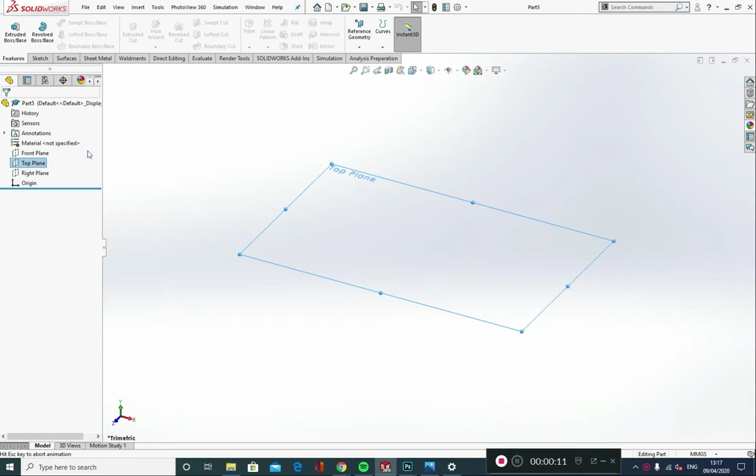Okay, so I'm in SolidWorks. I'm going to go to File, New, Part. I'm going to start drawing this particular mug from the top plane, so I'll go to top plane and Normal To. Now from here I'm going to go into the Sketch tab.

I'm going to grab a circle and sketch from my origin point. It's always good to ensure you've got a known reference point. So sketch that circle out, and I'm going to go to Smart Dimension. I'll left click on my circumference and give this a smart dimension of 80 for its diameter.

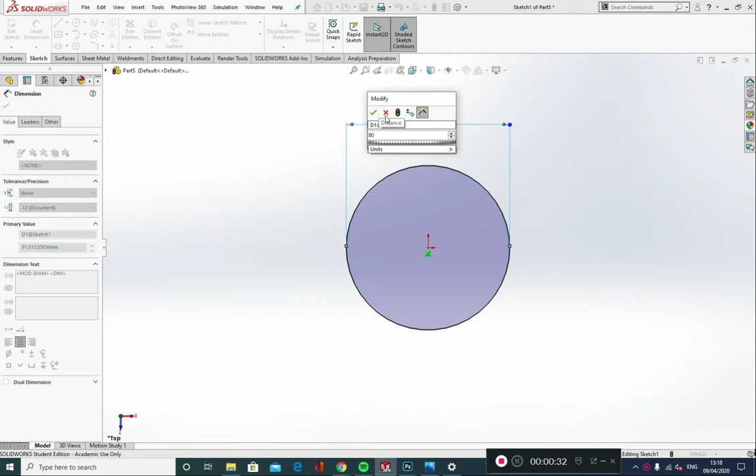I'm then going to make a feature out of this, so I'll go to Features, Extruded Boss Base. I'm going to extrude this by 100. I can use this arrow here and pull up on that until I get to 100, like so. Alternatively, I could have typed the value in here. Then I'll click on the green tick.

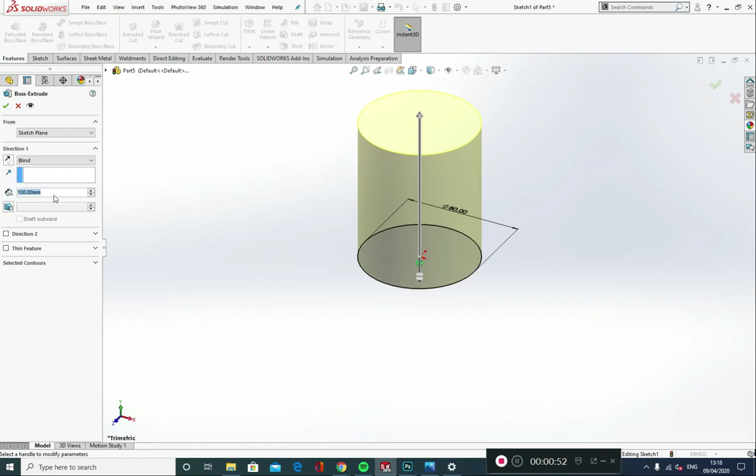Okay, that's the main cylindrical shape of our mug complete. We now need to put the handle on. So we're going to go into the front plane and sketch, and do Control 8 on our keyboard, which will give us a Normal To view.

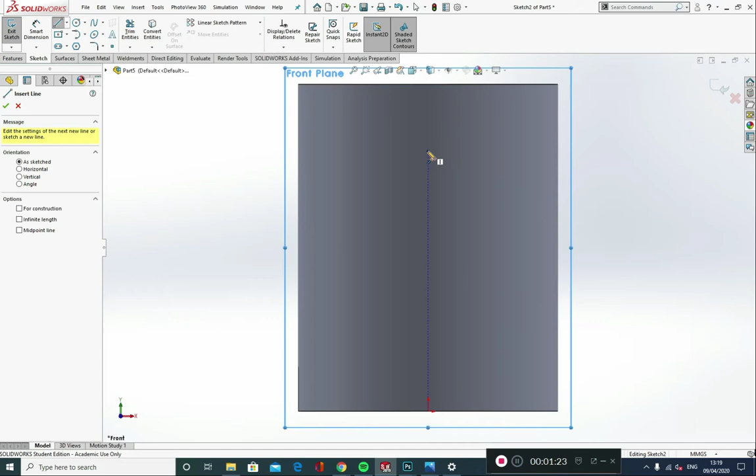From here we're going to get a line. We're going to draw a line in line with our origin. If I just hover over in line with my origin, I get this nice blue dotted line to show me that I am in line with the origin point. I'm going to left click again. Now I want an arc. The quickest way to get an arc in SolidWorks is to go back to the point without clicking and just move the mouse round in an arc direction, an arc movement.

Okay, and you will get that arc appearing. Left click again once it's in line with that top point, and back again, and left click again when it's in line with that blue line showing that it's in line with the first point we made and in line with the origin, and left click.

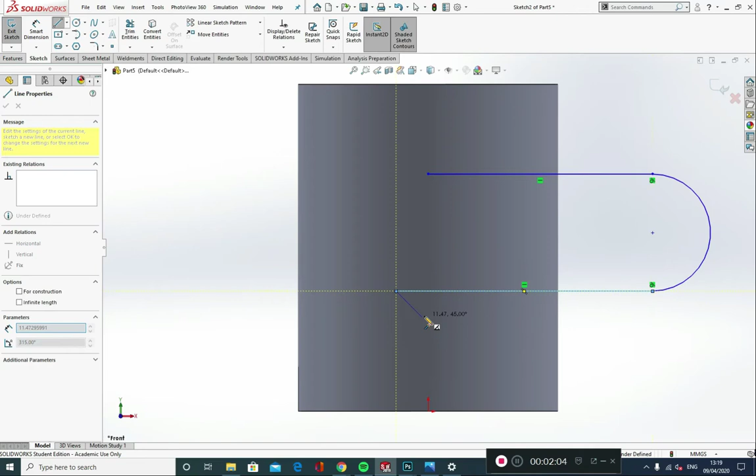Okay, if by any chance you make a mistake, let's say your line finishes over here by accident, that's not a major problem. All you need to do is pick on this point here, hold down Control, click on the origin point, and make those vertical.

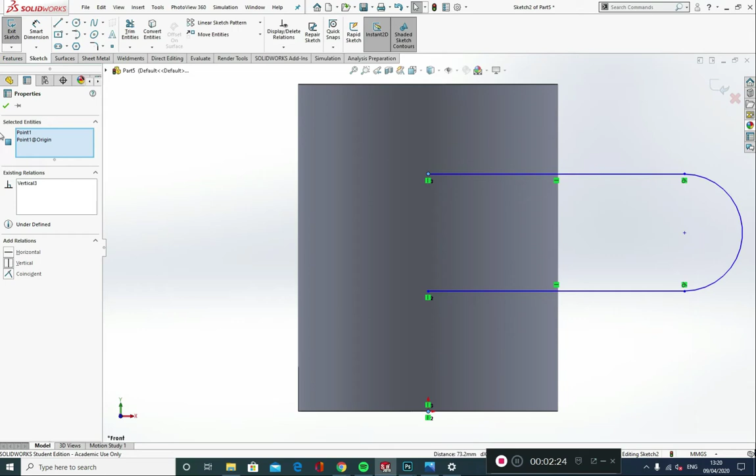Okay, let's sort that point out as well. So this point here, and click on my origin, and I want to make those vertical. Okay, so that just adds a nice relationship between all those points.

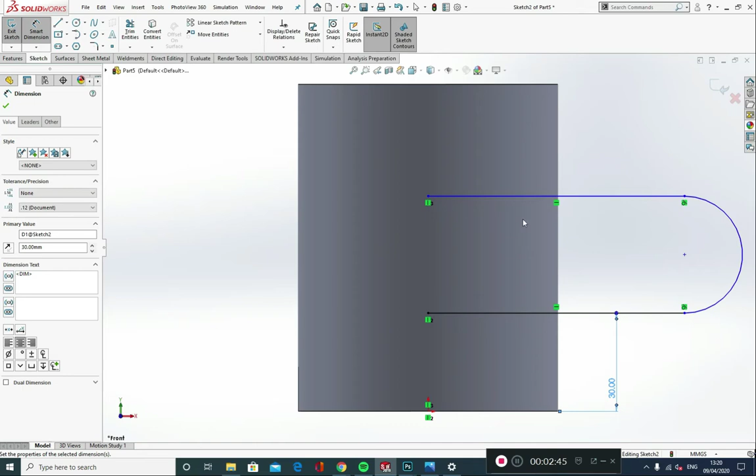Let's add some smart dimensions then. So we're going to go to Smart Dimensions. From this line to the bottom of my cup, I want to be 50. It's a bit high, let's try 30. It's a bit better. Okay, from this line to this line, I would like that to be 50. And from this point here to this point here, I would like this to be also 50.

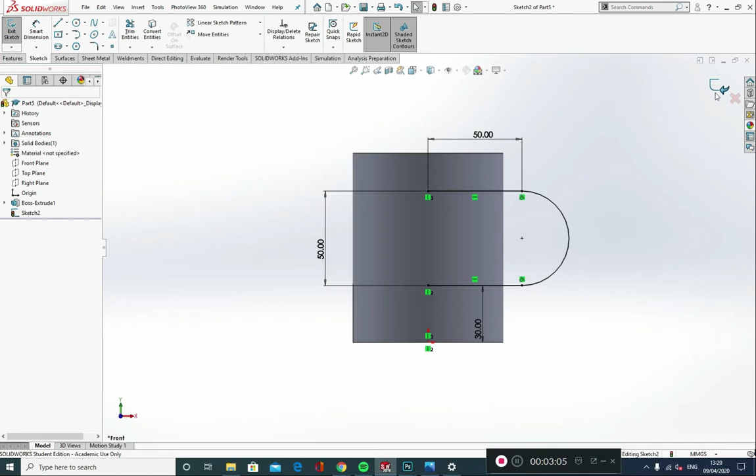Okay, and I'm going to click on the green tick, and exit the sketch by clicking on this icon here, and you can see what I've created. Now this is going to be the path for our swept boss base.

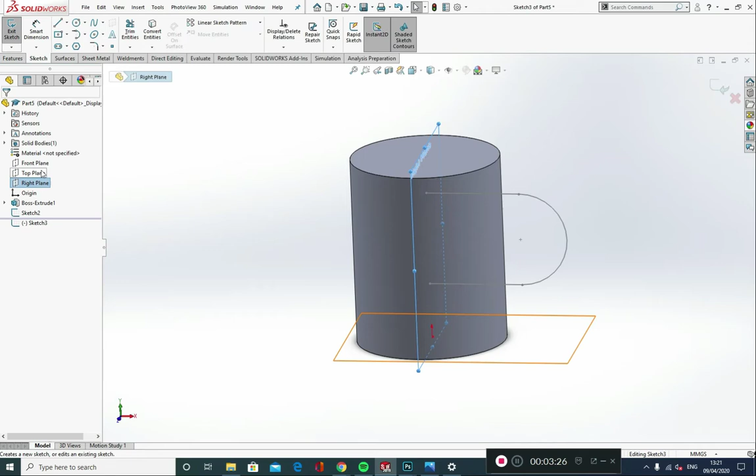So this is the path. We're now going to create the profile for this. So I'm going to go into the right plane, go to Sketch, and Control 8 on my keyboard for a Normal To view. I'm just going to change the display settings to hidden lines removed, just so I can see the sketch I just did.

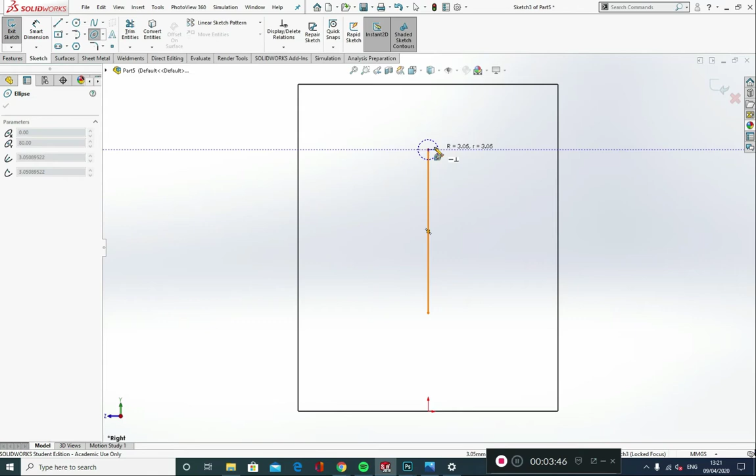I'm going to create an ellipse. So in my Sketch tab, I'm going to go to Ellipse. I'm going to click on this top point, move my mouse from left to right, or right to left. I'll click again, then move my mouse up or down, and that will give me the height of my ellipse. Left click again, go to Smart Dimension, and I'm going to give this a smart dimension of 15 by 6.

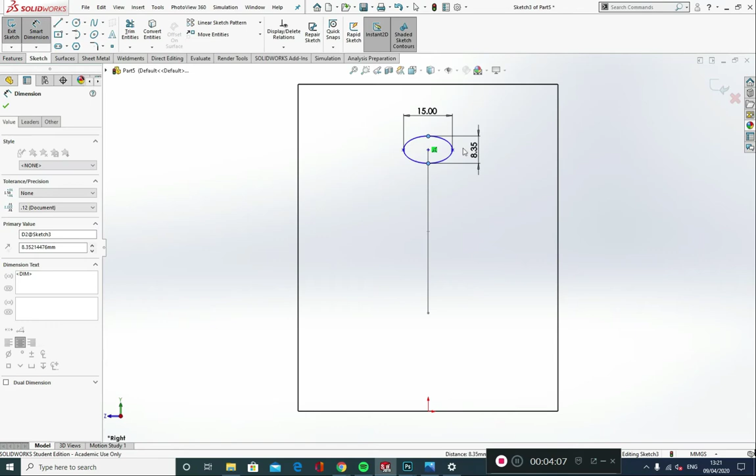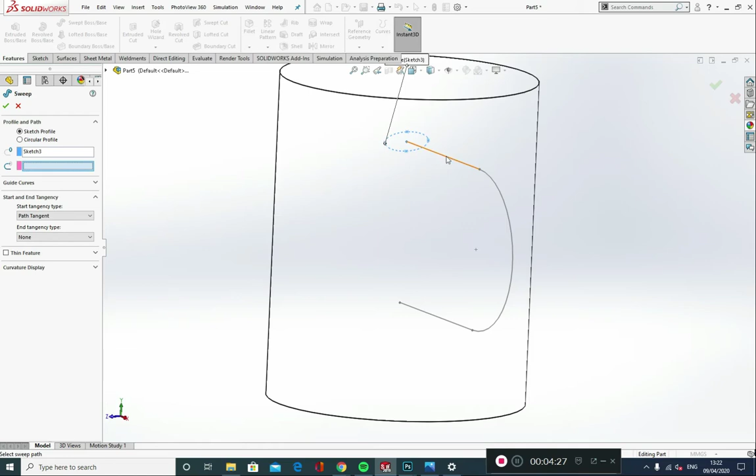Okay, green tick, and exit my sketch. Now from here, I'm going to create a swept boss base. So I'm going to go into Swept Boss Base. You can see here, because I already had that sketch selected, it's picked up my profile. I now need to pick the path, which is going to be this line. That's been created, and I'm going to click on the green OK button.

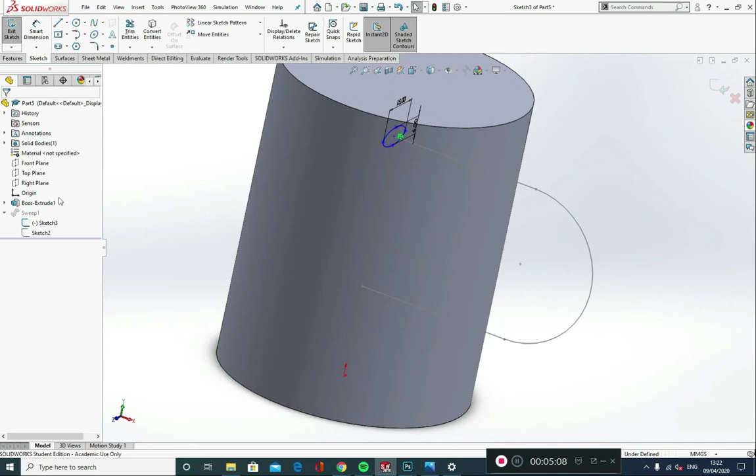Now that's looking a little bit skinny for my liking, so I want to beef this up a little bit with bigger dimensions. I'm going to go into my Sweep1, click on this arrow next to it, and I can see my two sketches. This sketch is fine, so the path is fine. It is the profile that I want to lengthen some of the dimensions. I'm going to left click on the icon and go to Edit Sketch, Control 8 on my keyboard, so it's a nice normal view. Double click on this dimension and change this to 20, and double click on this dimension and change this to 8. From here I am now going to exit the sketch, and you can see that has been updated.

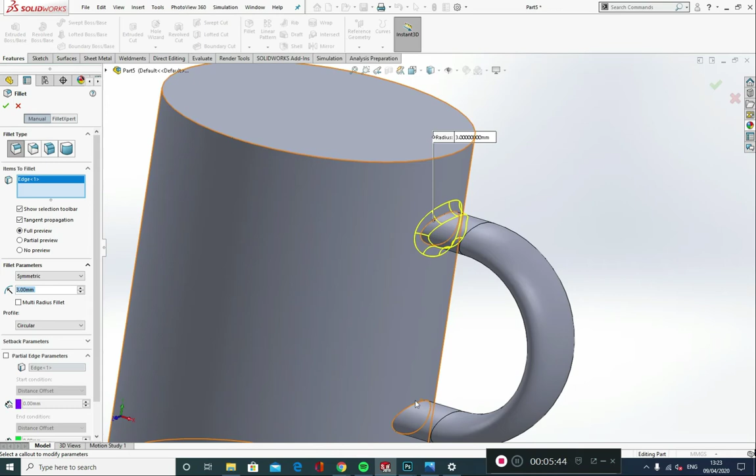Let's apply some fillets now. So in Features, I'm going to go to Fillet, and I want a constant fillet, so it's this one here on the left hand side, and I'm going to make these 3mm. I'm just going to left click on this edge here. You can see we've got a nice full preview because this has been selected, and I'm going to select this edge here.

Once I've selected those two, I'm going to click on the green tick, and I'm going to go back up to fillet, and fillet the bottom with an 8mm fillet. Just click on this bottom edge, like so. It's looking a bit too big, let's make that 6. It's a bit better, and green tick.

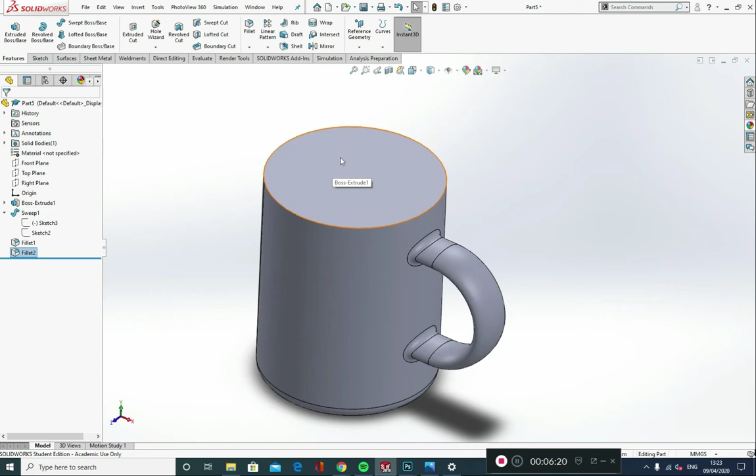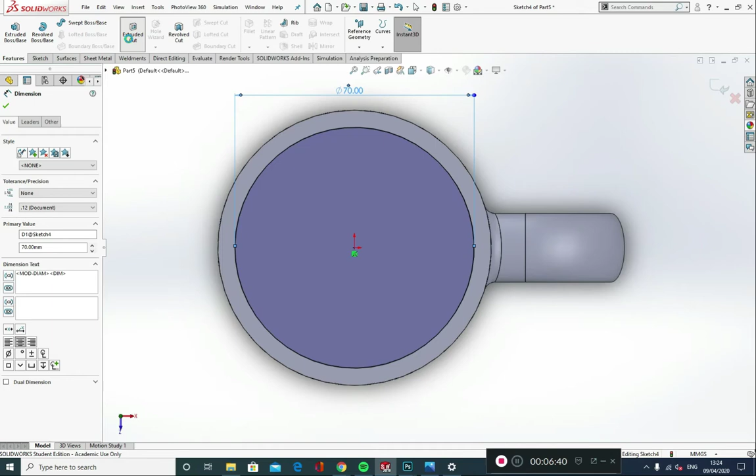Okay, from here I need to hollow out my mug. There's two ways you could do this. You could do this by one method, an extruded cut, which would be to click on this surface and go normal to it. Go sketch, circle, from my origin point, sketch out, smart dimension this up at 70, and then go to Features, Extruded Cut, and you could cut that by 94mm, let's say, and green tick, and that would cut out that material.

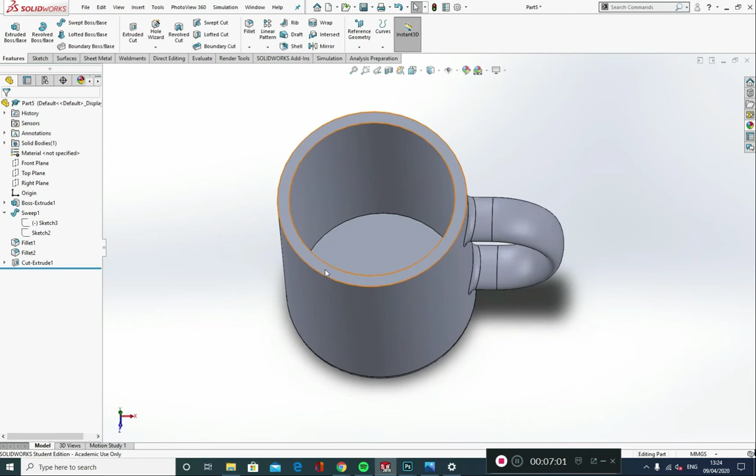Now there is another way of doing this, so I'm just going to right click and delete, and I'm just going to delete my sketch as well.

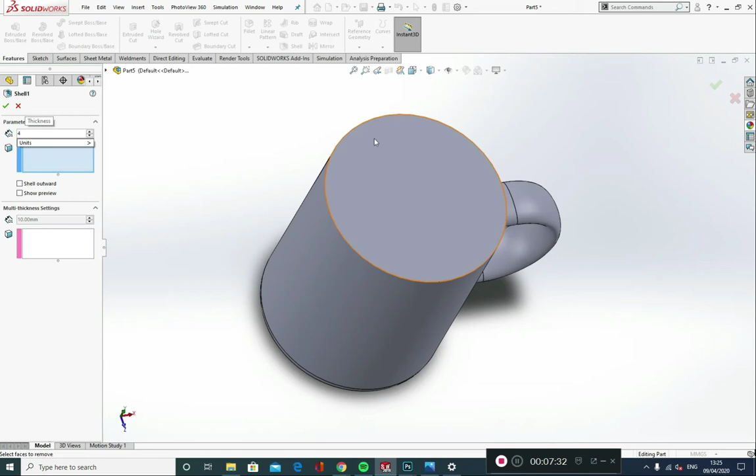I'm going to show you how to shell. Shelling is good when you've got a feature that's been hollowed out. So under Features, we're going to go to Shell, and we're going to give it a parameter of, let's go with 4mm for the shell thickness, and then it's asking me to click on the face that I want to shell. I'm going to click on this face here, and then green tick. And there we have the same result.

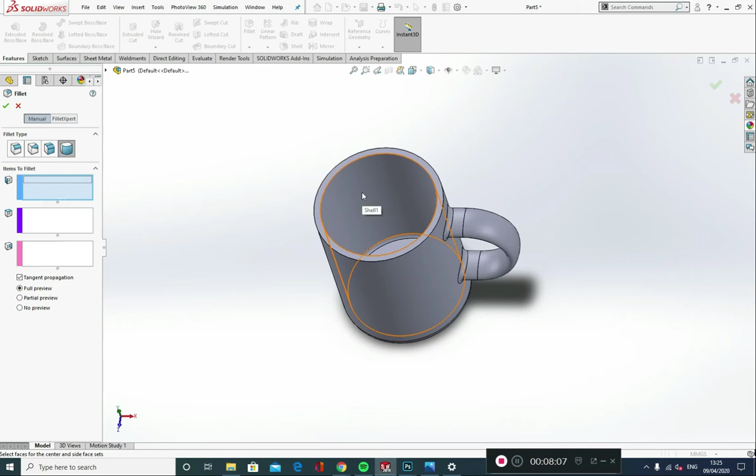From here, let's put a fully rounded fillet on this. So I'm going to go to Fillets, choose the fourth option across, full rounded fillet, and we get a blue, purple and pink set of boxes. The blue face set 1 is going to be the inside, the purple is going to be on top, and the pink is going to be on the outside of the mug. And you can see we've got a little preview there of the fully rounded fillet, and green tick.

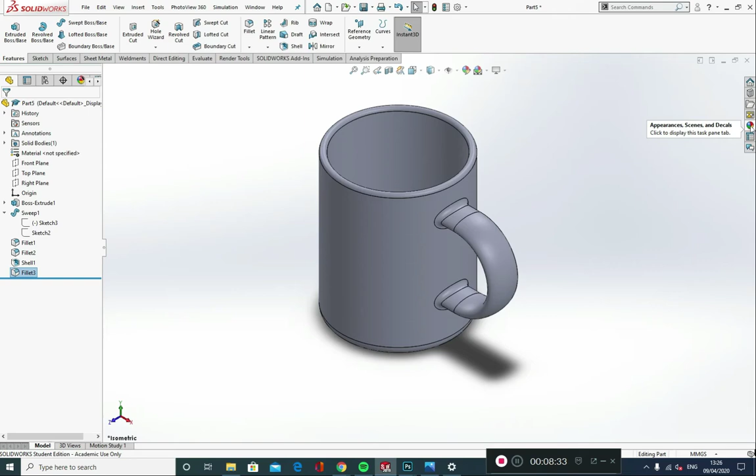Control 7 on our keyboard will give us a nice isometric view, and then from here we can apply an appearance. I'm going to go into Appearances, Scenes and Decals over on the right hand side, into Appearances. For this I'm going to choose a plastic.

Sometimes you find that some of the materials look a little more like ceramics than others. I'm going to choose a medium gloss, a white medium gloss plastic, to look like ceramic. We've got face, boss extrude, and body. I'm going to select body.

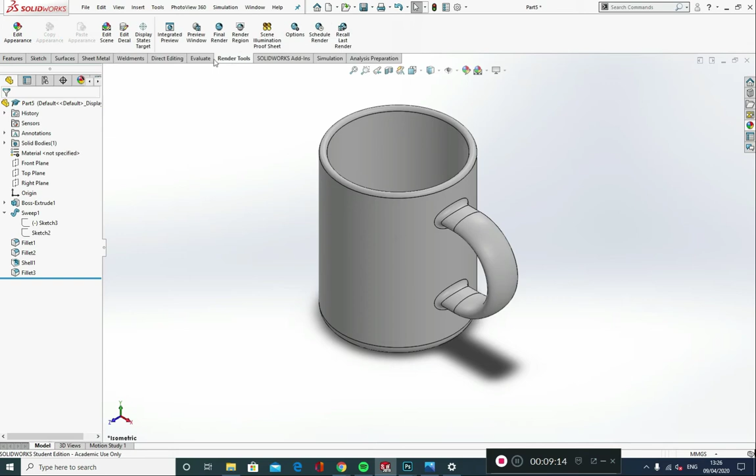Now I'm going to show you how to apply a decal. You could go into Decals, down at the bottom, but I prefer to go into the Render Tools, Edit Decal, and then pick my image path here.

So I'm going to browse for an image. I'm going to go onto my desktop, find my Fortnite folder, and pick this one here. It's good to use a PNG file if you can get one.

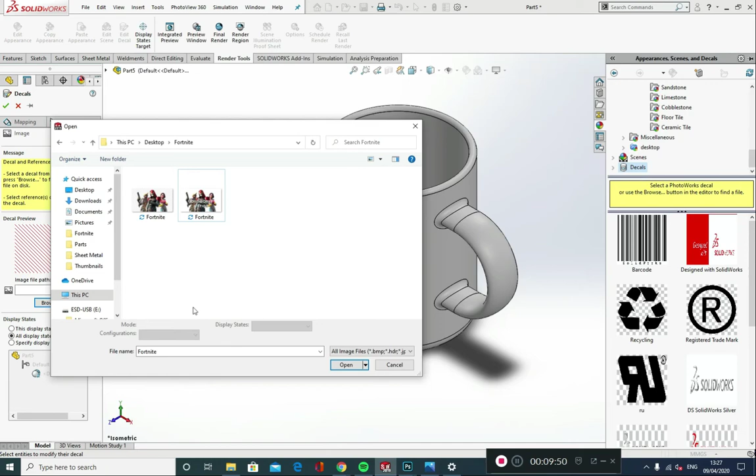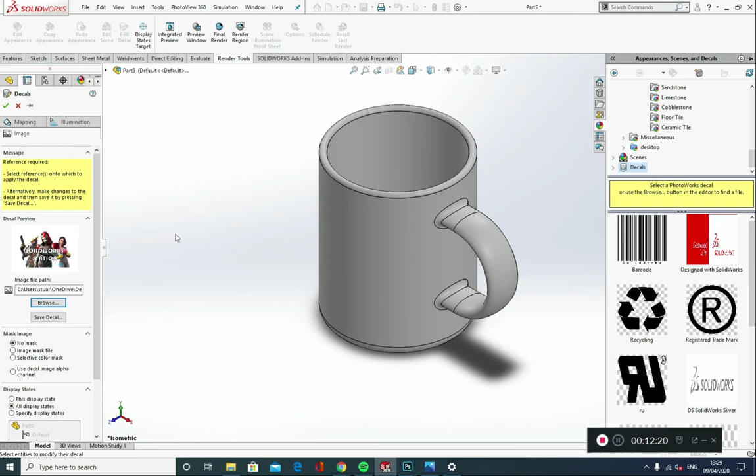So I'm going to pick this, and then click on the face that I want it to appear on. I'll click on this face here, and you can see at the moment it's kind of wrapped it around the mug.

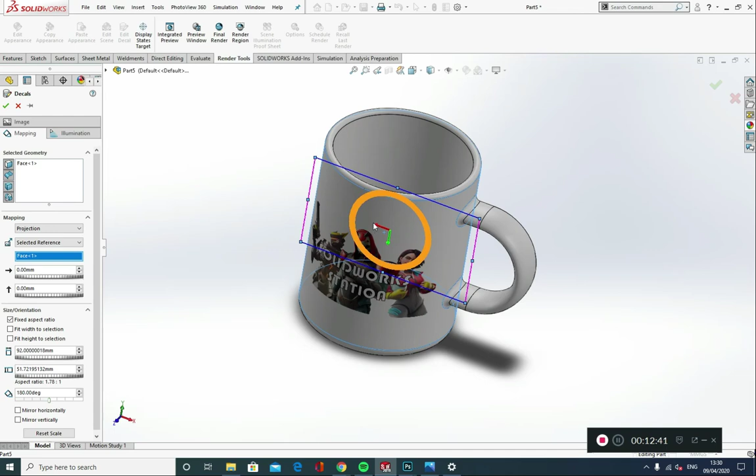I don't want that to happen, so I'm going to go into mapping and choose projection instead of cylindrical, and then from here I can move this around a little bit on my mug.

Just change to a side view so I can position this nicely. Something like that is fine. Green tick that, and then from here we can go out and render this.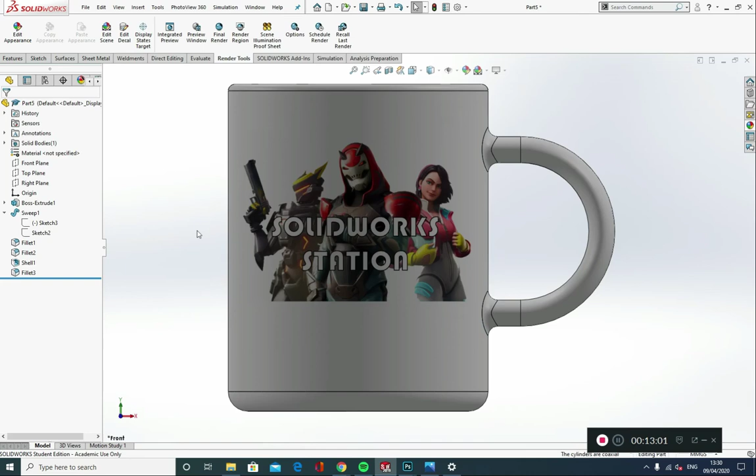How to render would be to go into your Render Tools. If this isn't available, it's probably because you need to right click and ensure Render Tools is available. Make sure SolidWorks Add-ins is in there as well, and turn on PhotoView 360. If SolidWorks Add-ins isn't there, just right click and choose it from this set of options. So PhotoView 360 has got to be on.

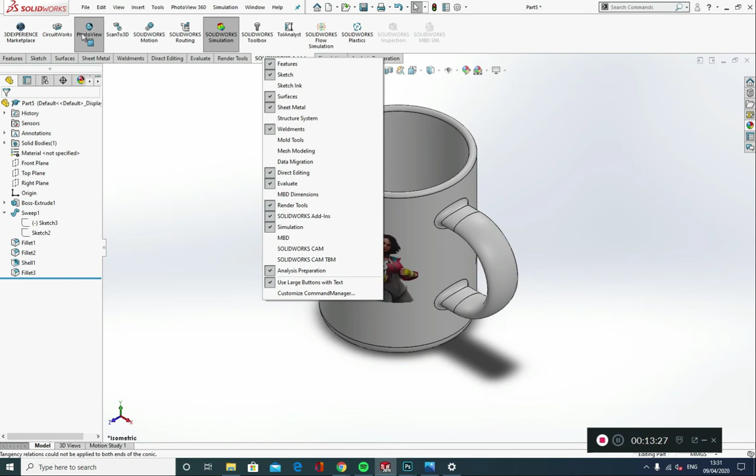Go to Render Tools. You can edit the scene if you want to. We've already edited the appearance of the mug and placed on a decal, so we can now just go to Final Render. It may give you an option to add a camera or look from an isometric or perspective view, and then we just wait until the computer's rendered that particular image.